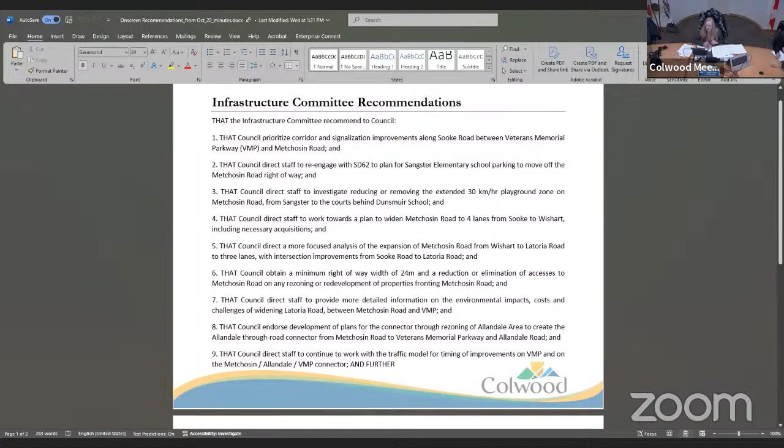When I sent that around to everybody, I agree with this, but not with that. Everybody has a little bit different perspective. I wanted to clarify that council was not anticipating recommendations from this committee at this time. We're fairly early in the decision-making process, still trying to put all the information out there from staff and have the committee understand, and go out to the community to hear from them as well and continue that discussion. But I think it's important that if the committee wants to suggest things to council, they are able to do so. So I'm at that somewhere-in-the-middle stage of trying to say this is what the committee was thinking, and whether or not you want to send this forward to council at this time is in the committee's hands. I have not put this forward to council yet because I didn't feel I had a clear understanding that I could represent you well at the council table in support of the motion.

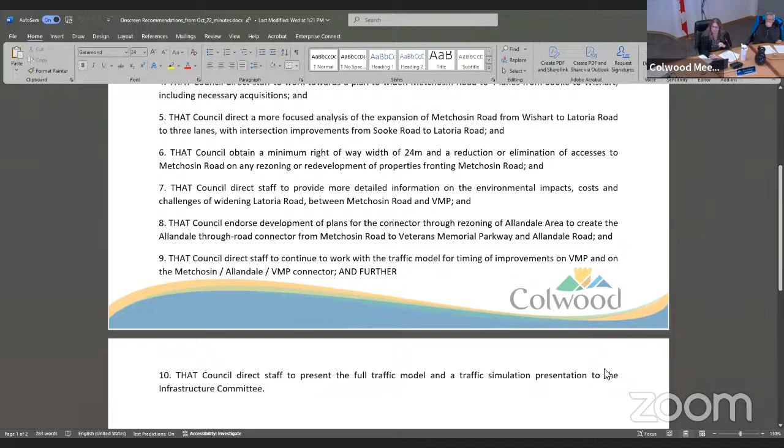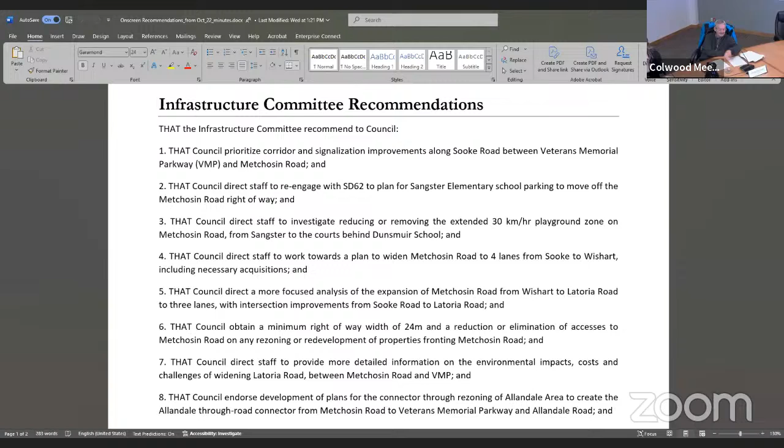I agree. Okay, we will revisit the motion. So shall we table the minutes for now then? Would you like to move that we table the minutes till after the discussion? We can table the minutes till after the discussion. Thank you. Is anyone opposed to tabling the minutes until after the discussion? Seeing none, that is carried.

All right. Okay, I'm sorry, I'm losing my spot on my agenda. Too many pieces.

Now we have opportunity for public participation. Is there anyone online? No, I don't think so, other than committee members. And there's no one in the audience. Therefore, we will move on then to the traffic model simulation. Josh.

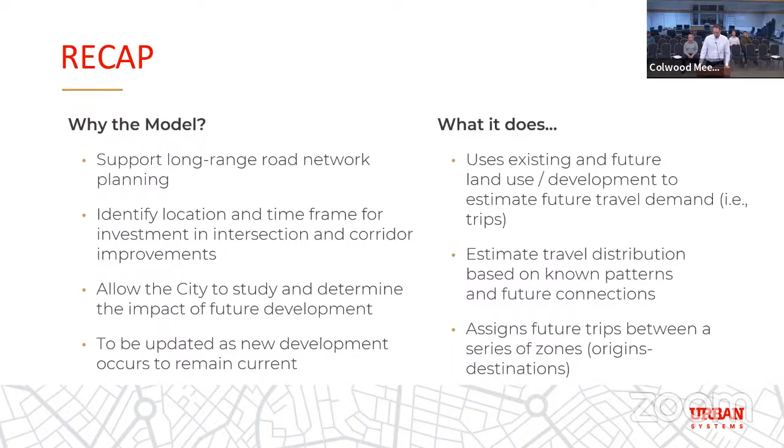Last time around we introduced the map on the right here, which divides Colwood into 22 zones, and I believe there were 8 external zones as well. All of the travel demand and trip-making happens between each of these zones.

We also talked about how the model represents the morning peak conditions, which is sort of the most concentrated and predictable period for traffic.

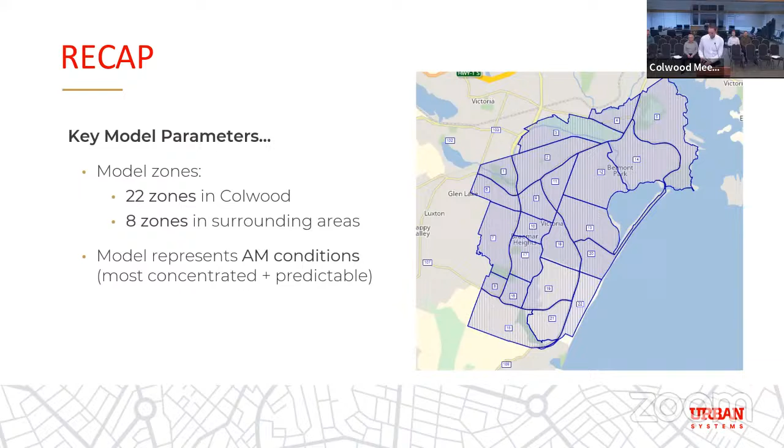There was a fair bit more in the presentation from a couple weeks ago, but we got to two key candidate scenarios, the ones on the screen in front of us. The one on the left represents corridor widening on Latoria with a package of improvements on Metchosin Road as well. The image on the right focuses on four-laning along the length of Metchosin with a package of improvements along Latoria as well. There was a fair bit of dialogue around exactly what's behind these two scenarios.

In a little bit here we've got some added information, some new maps that we think do a more complete job of describing all of the improvements to be included in each of these scenarios. So there's a little bit more coming on that.

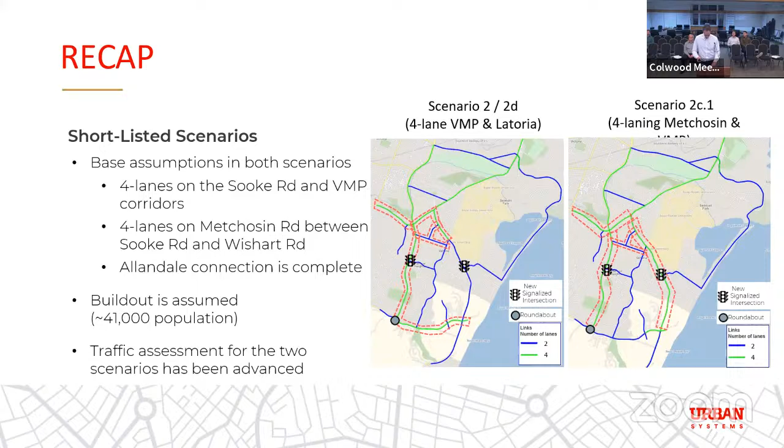Okay, and then we did a recap on the modeling work and the two different packages of improvements. There's a way to get acceptable and comparable traffic conditions under each scenario, but we concluded that there are other things we should be considering beyond simply traffic performance in determining which package of improvements would be the preferred way to go.

So we talked about traffic performance. We also talked about things like the potential and timing for redevelopment along these corridors, how much time and complexity it might take to assemble the additional right-of-way needed to achieve four-laning on either scenario. We talked about complications around utilities, pole movement and or potential undergrounding, which has significant complication and cost. We talked about some environmental concerns, and generally about the capital cost associated with each scenario.

So this is really where we concluded last time around, especially with respect to the presentation, and obviously there was good dialogue and Q&A that came after that.

So next I was going to move to some of the new additional information. Before I do, happy to pause.

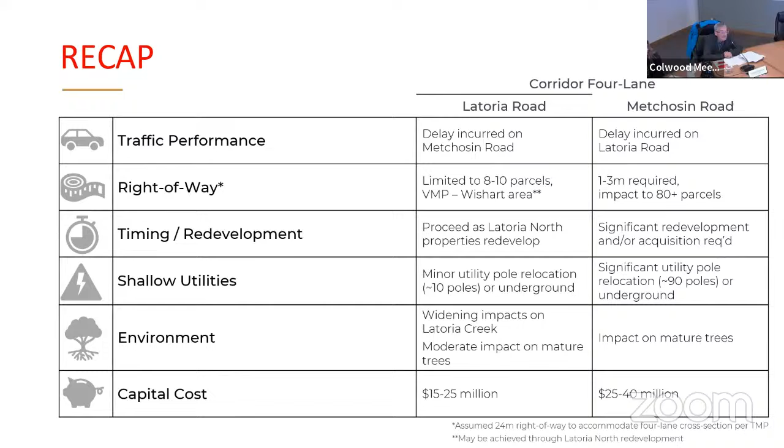I just wanted to ask, did I hear you say that under either scenario, the traffic congestion or traffic performance is about the same? So similar results if you do option A or option B? That's how we build these scenarios, to try to get them up to a level that we believe in the future will still be acceptable and comparable. Okay, thank you. That's a big step. That's news to me, so thank you.

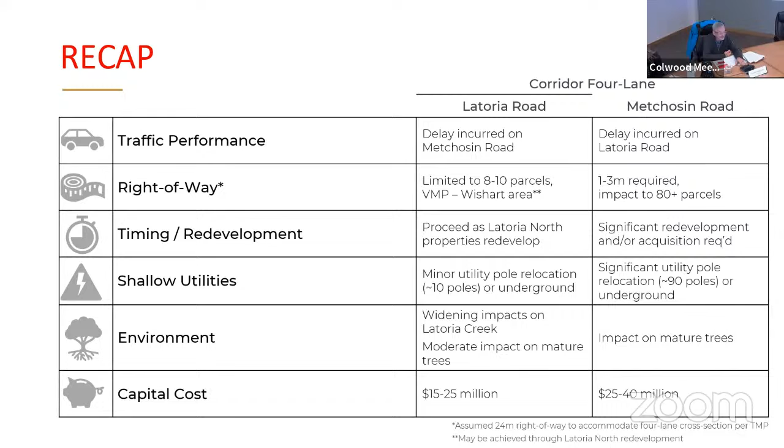I think part of that too, was just, we also entertained scenarios where only a single corridor was widened, like maybe just VMP or even just Metchosin, and concluded that under that ultimate build out scenario, which is kind of all of South Colwood, the traffic conditions would not be okay. So those weren't advanced. We also entertained a scenario of VMP, Latoria, and Metchosin all being widened. The conclusion there was that because the two shortlisted scenarios can get to a decent and acceptable traffic performance, the cost and complication associated with trying to widen all three was excessive.

Dan, for clarification, I want to be sure on the right of way, Metchosin Road, 1 to 3 meters required, that's 80 parcels. Now I'm assuming that is Metchosin Road from Latoria to Sooke Road. Correct. And if that's the case, do the new sidewalks that were poured 3 or 4 years ago have to be removed to do that? I can't say for certain, but my hunch is yes, they would be. Okay, thank you.

Okay, moving along. So we heard the conversation around the table a couple of weeks back, took back some of the flavor and nature of the conversation, and wanted to come back with additional information that we hope answers some of the questions that came up and provides more confidence in how this work was done and where it's going. I'm going to start with some visuals we developed to help better communicate what's involved in both of the two shortlisted scenarios. I'll work through those, and then my colleague Ming, who's in the meeting online, will speak to some of the details of the modeling work, including expanding on the difference between the citywide travel demand model, intersection modeling, and simulation.

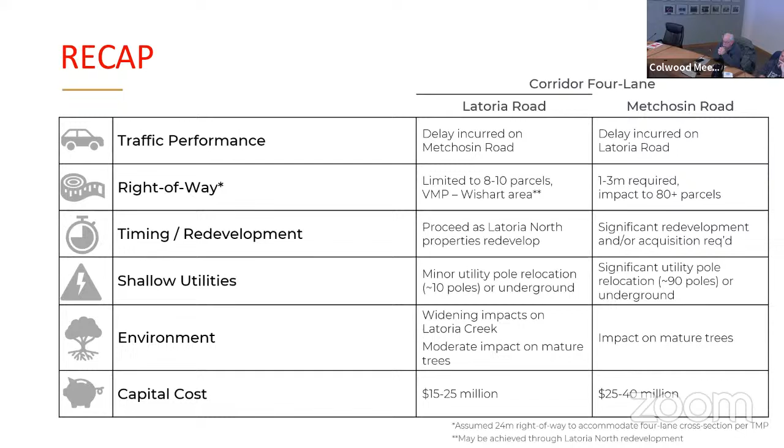Carry on. Okay, so I think last meeting there was a fair bit of dialogue around understanding that it's not quite so binary as to say it's 4-laning this one or that one. It's actually a package of improvements focused on 4-laning of this one versus that one. But there was a desire to better explore and understand what those supporting improvements might also be, not simply just which corridor gets widened. So we've pulled together a series of maps to help visualize that, and maybe I'll walk the group through those, but please throw up your hand if there's anything you'd like me to pause on and explain further.

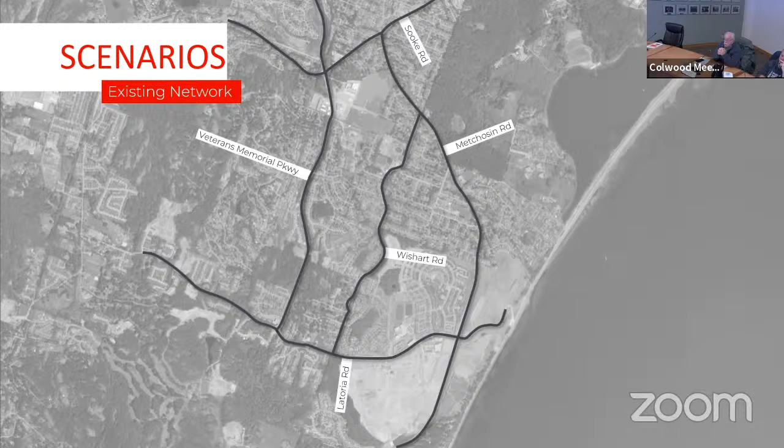So here's your major road network in South Colwood. Now, we talked last time about some improvements that we're suggesting need to happen in the network regardless of scenario, and that's what's being shown here. That's 4-laning Veterans Memorial Parkway all the way south to Latoria, shown in thick red line. That's the 4-laning of the remaining portion of Sooke Road, the section between Metchosin Road and VMP. That's the northern section of Metchosin, Latoria to Sooke. And that's the Allendale extensions we talked about, not 4-laning those, but connecting them at a 2-lane scale.

Can I just ask why Veterans Memorial is deemed as requiring those additional lanes from Carindale to Latoria? That's not typically an area where I see backup. I see people drive that section quickly, and sometimes there are long lines of traffic, but that doesn't necessarily mean those improvements would lead to better commute times or address capacity issues.

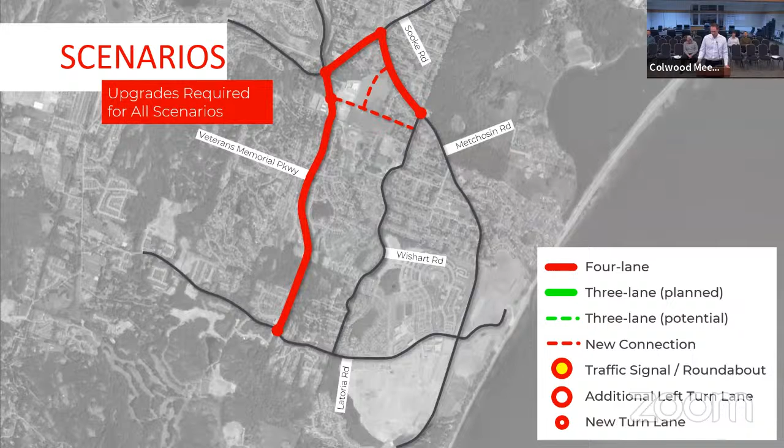Good comments. So keep what's on the screen in front of us in mind. These are a series of improvements being shown under both of the two scenarios under consideration. Scenario 2D is the Latoria Road focused widening scenario. What we've done here is shown the improvements we just spoke to, layered on the improvements specific to this scenario. We talked to much of this at the meeting a couple weeks back, but thought it would be helpful to come with visuals to show what and where. So that's what's on the screen in front of us.

So for scenario 2D, it's obviously the 4-laning of the Latoria corridor. It's the expectation that over time, traffic signals are going to be needed at Wishart/Latoria and Byzantine/Latoria.

Then if we shift over to the Metchosin corridor, we heard a lot of conversation last meeting around: well, if it's not 4-lane, could it be 3 lanes? That third center lane would be left turn pockets at key side streets, and potentially two-way left turn lanes in the center for portions of it. So we took that back, and this is diagrammatic - it has not been designed, but the goal was to demonstrate where that third lane, the center lane, might actually have some really great value.

So the thick portion of the green is extending roughly from the top of the hill at Royal Bay and Beachlands, starting right at the beginning of the top of the hill and extending about as far as just past Painter. Beyond that, we get into single family on the west side, roughly, and the Royal Roads forest and fence line on the east side - so we're not seeing the same level of value in providing that center lane for just one-sided turns.

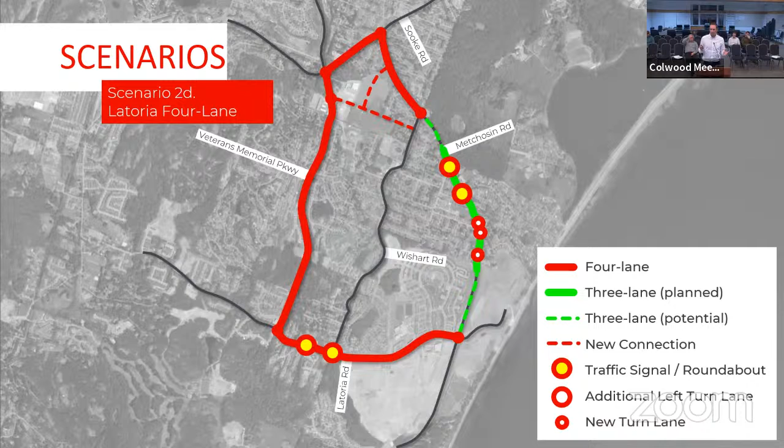Okay, so this is the 2D scenario, the Latoria widening scenario, with kind of the full package of improvements elsewhere in the network. And then we switch over to the Metchosin 4-lane scenario. So this one, I guess the highlights or the menu of improvements include 4-laning of Metchosin for the full extent, including the portion from Sooke to Wishart and then Wishart to Latoria. It would presumably transition down back south of there.

Still includes the expectation that Lagoon and Painter will require upgrades into the future. Our expectation is that by focusing, widening, and in doing so encouraging more traffic in this direction, there's going to be added turn lanes needed at Wishart and at Sooke, and even the potential for dual left turn lanes to move as much traffic through each signal cycle as we can, to not interrupt the through flow, which is going to make for some potentially pretty major intersections.

The left turn ads we introduced last time around on Metchosin Road at Hatley, Cotlow, Ben Homer - there's probably less of a need for those under this scenario, but still the potential in the longer term, they might be beneficial if through volumes continue to climb on this corridor.

And then the expectation also that on Latoria, a signal at Wishart is still going to be necessary, and that Latoria Byzantine intersection as well, really largely driven by what the immediate development around that location looks like. So, yeah, this is kind of the full package of improvements that might be associated with the Metchosin Road 4-laning.

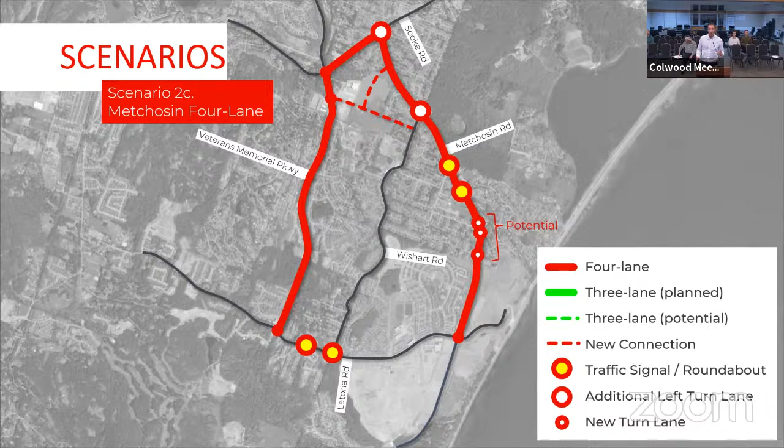So Ming, are you there? Yes, I am here. Thanks, Dan. First of all, check my audio, audio check. Yeah, you sound okay, good. Oh, okay, perfect, thank you.

So I'm going to talk about some specifics about the modeling work that we have done, and always feel free to ask any questions as I go. So when we say model, it's very specific to a model called a travel demand model. I want to emphasize that the model we're calling is different to the simulation that we later refer to. A travel demand model is a tool that we use to forecast future traffic volumes as a result of change in land use network. And the software that we used for this particular travel demand model for Colwood is called Visum.

For a travel demand model, the input is land use and network. So for example, when we develop an existing model, we will input the existing land use in terms of population, employment, and all the breakdowns. We also code the road network into the model, and we do the same for future scenarios.

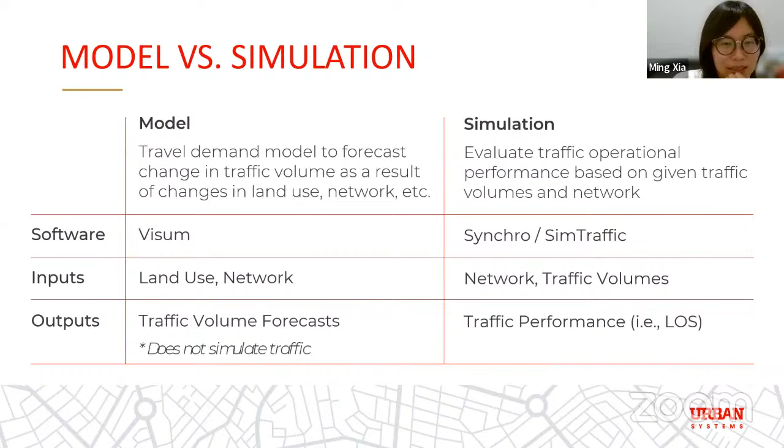Next slide, please. I just wanted to touch base a little bit on model calibration.

This piece is crucial when we develop a travel demand model. I know there have been questions about how the model would pick one route versus another. The foundation of developing a travel demand model is always to make sure the existing base reflects today's condition. So once we develop the existing base case, we need to compare the model results against the observed information, to make sure the model follows the same logic as today, which gives us a solid foundation to predict the future.

We have a few bullets here talking about the considerations we apply when we calibrate the model to today's condition, and these all follow industry standards. This included trip generation, trip distance, and traffic counts.

When we develop the existing travel demand model, it always takes quite a few iterations. Through these iterations, we compare the model results versus the CRD household travel survey, checking whether the trips generated within Colwood are comparable to the travel survey for Colwood. We also check the trip distance the model is projecting for today's condition versus the survey numbers, to see if they are comparable.

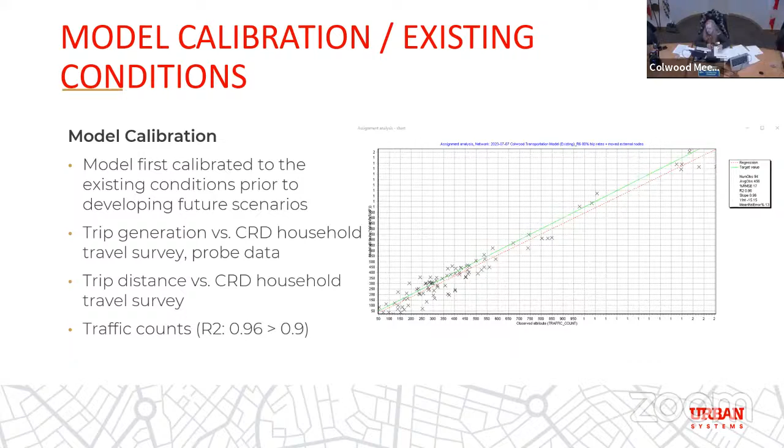Part of the reason is that a lot of these counts are low in terms of their magnitude, and there are a lot more counts on the lower end. These are more difficult to calibrate because the volumes are lower and they get more sensitive to certain changes. Usually we're trying to make sure that the bulk of the volumes are following each other, knowing that some of the lower volume locations might not be 100% calibrated.

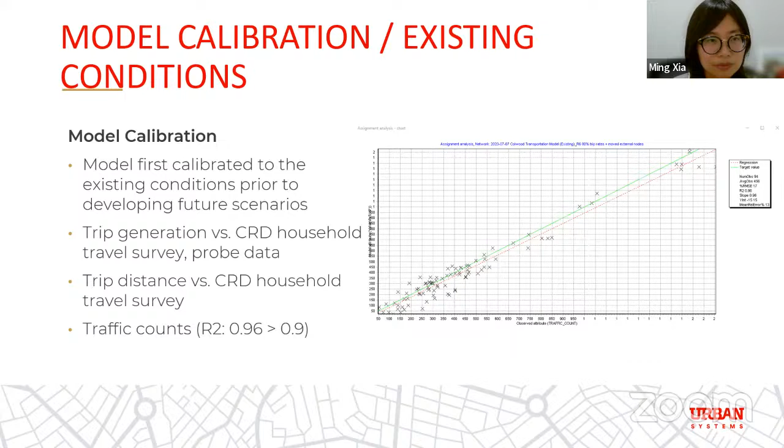Back to the previous slide, there are a lot of locations. Some of these locations have fairly low volumes, but we compared all of them, knowing that some might not necessarily be well represented in the model. The focus was put on the major corridor level, where there was a lot more traffic volume, because that will be the focus here.

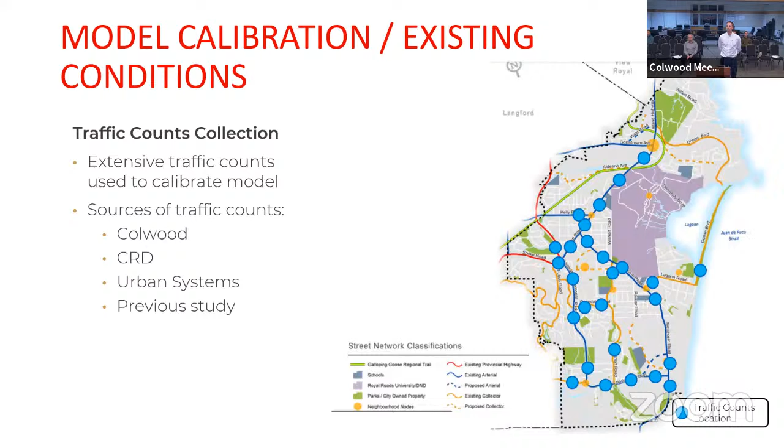I just wanted to keep in mind that there are quite a few different ways that we're getting data. We're getting data from actual traffic counts done with various pieces of physical equipment. We have traffic counts potentially done by static devices we've upgraded in our community, including Blue Toad for travel time measurements, and some of our newer, fancier traffic lights that may modify themselves based on traffic speed or conditions. So we're trying to look at where all our data is coming from, to check that our assumptions are correct and that we're not missing something.

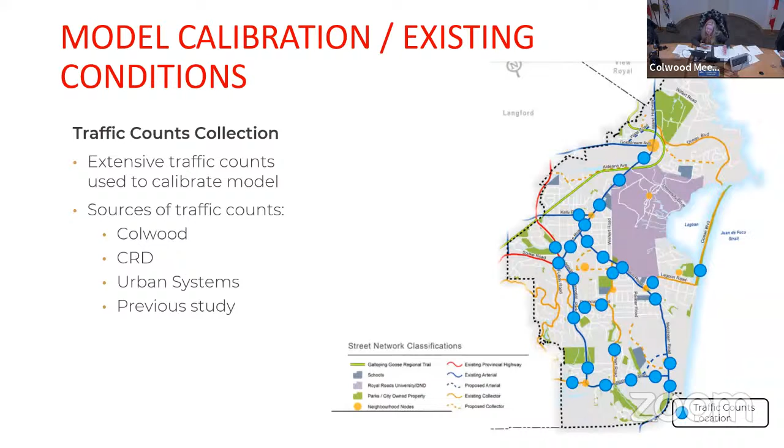Yeah, 100%. We definitely wanted to use as many sources as possible to make sure we're confident when building our analysis.

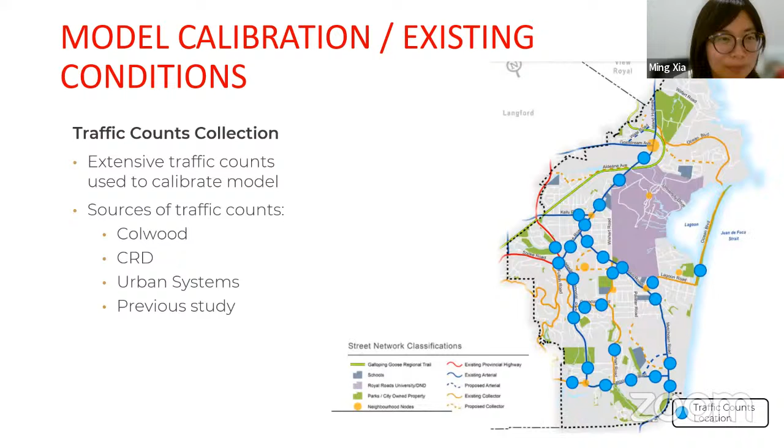Okay, so route choice. How does the model assign traffic? There's quite a bit of text, but I'll try to simplify the procedure and hopefully explain this better.

The first step for us to develop the travel demand model is to make sure the existing model is calibrated, meaning it reflects today's conditions. Once we confirm the existing model is calibrated, that means the way the model builds the OD pairs, origin-destination pairs, makes sense based on existing land uses. So if we have population and jobs in certain areas, the model is able to build travel patterns between these areas in a reasonable way.

We know the model is building these predictions reasonably by first checking the model counts, model volumes, trip distance, and trip generations. Once all these parameters have been checked, we believe the model is able to develop OD pair patterns based on the land uses inputted into the model.

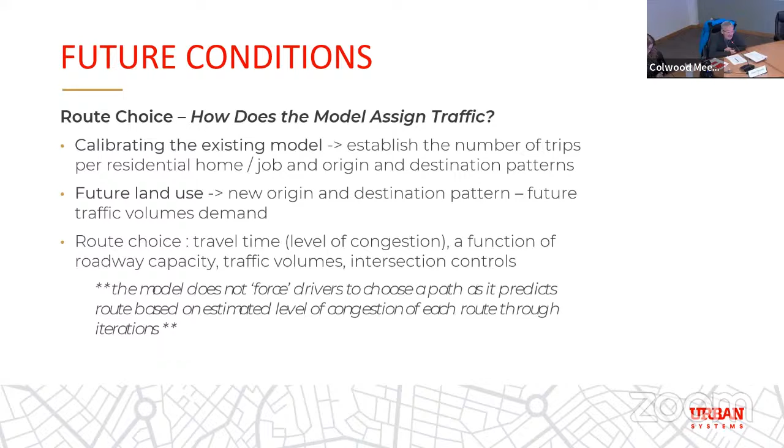There you go Stuart, heck of a job what you've done here. But from what I'm hearing, you haven't looked at mode shift, just more of the same, and you based it on full build out. It sounds to me like what we're looking at here is perhaps worst case scenario. We're all optimistic that something's going to be done somewhere about the traffic, but that's something probably for the committee to chew on over the coming months, what parameters do we set. If this is the worst case scenario and we believe there may be some options out there to improve upon it, it probably speaks more to the timing of when these things are done than not, but that's useful for me to have in the back of my head. So thank you very much.

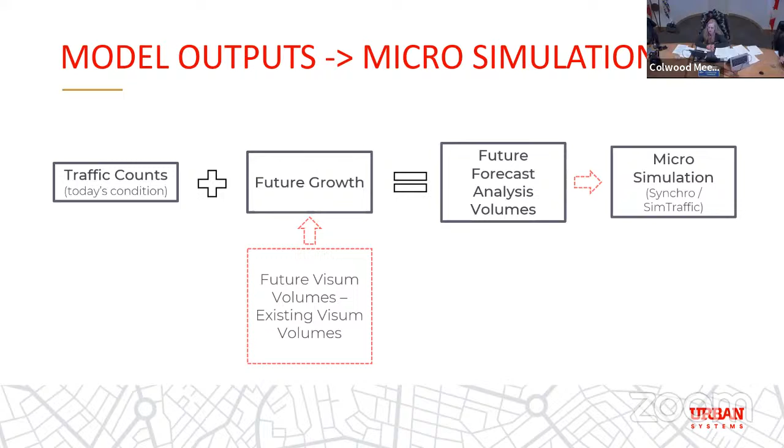Or it could be capped with mode shift also -- that's another future potential. All right, I'll let you carry on. I'm seeing no more questions.

Okay, so now moving on to the micro-simulation model. We have some images here to illustrate what the simulation tool would look like. The picture in the middle is really an image that illustrates the network that's coded into the model. I had to take out the background image, otherwise the network doesn't show up very well. So there's a zoomed-in picture on the right-hand side.

It's really just to show how the network will look in the model. It doesn't mean that this is what we're proposing -- it's an example showing the laning that could be coded into the model. When we run simulations, we look at this network and we'll see vehicles running through it. That's how we'll watch the simulations.

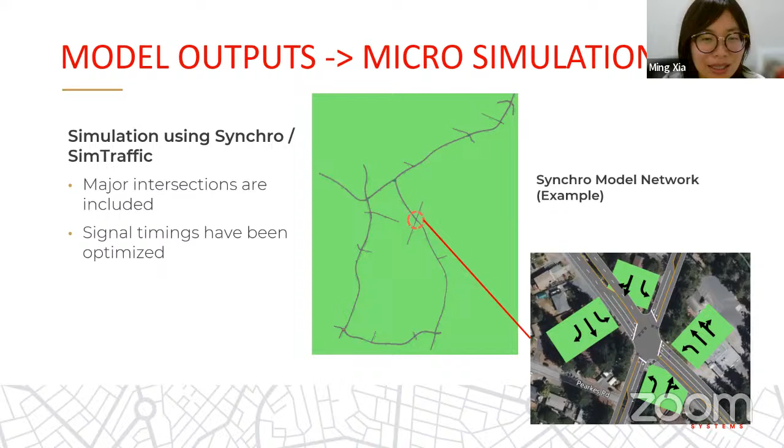Okay, and just some images from different software, kind of explaining that there are different tools. The one on the very left, that's a screenshot from Visum. It's showing the volumes along a corridor, and the table below gives information around traffic volumes at this intersection at certain movements.

The one in the middle is from Synchro. Once we have the volumes established using Visum, we move on to Synchro and input the volumes. Here is the intersection with a lot of traffic volumes assigned. When we move on to SimTraffic, we run the model and see traffic volumes or vehicles running in the network. This is where we watch the simulation and see if there's any capacity issue, or any traffic getting queued up. So there are different stages for the type of work we do here.

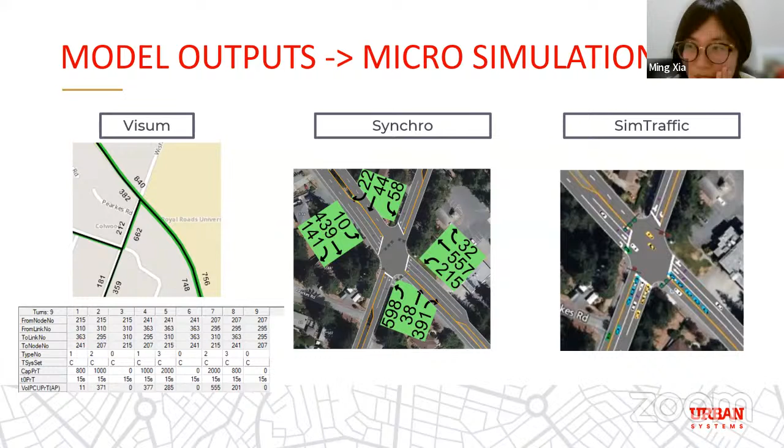Hang on, give me 1 minute. I think once we get that up, Ming, it might be great if you could narrate. We can watch and listen at the same time. There's no audio with the sim, it's just visual. But you're going to see different colored cars, different size cars, and the intersection operations occurring over time, the different signal phasing, certain movements moving and others stopping. So it might be nice if we get a description of that as we go.

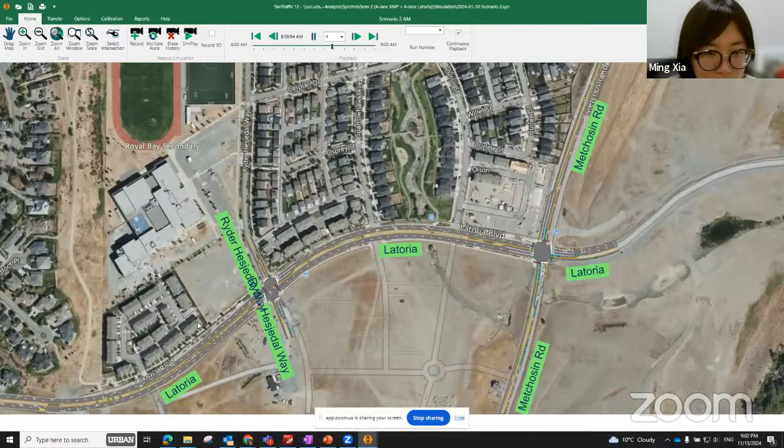If I move further down, this intersection is also pretty busy. And here you can see that the traffic flows generally well along Latoria.

And the traffic that we're observing on the roadway here, is that the future OCP or the existing? This is built out, where we assume Latoria gets widened into 4 lanes.

I just wanted to add that I think they already mentioned for either of these scenarios, with adequate improvements along these corridors, we will be able to reach an acceptable level of traffic performance. It's just that depending on the plan for the corridors, these intersections will require different types of improvements.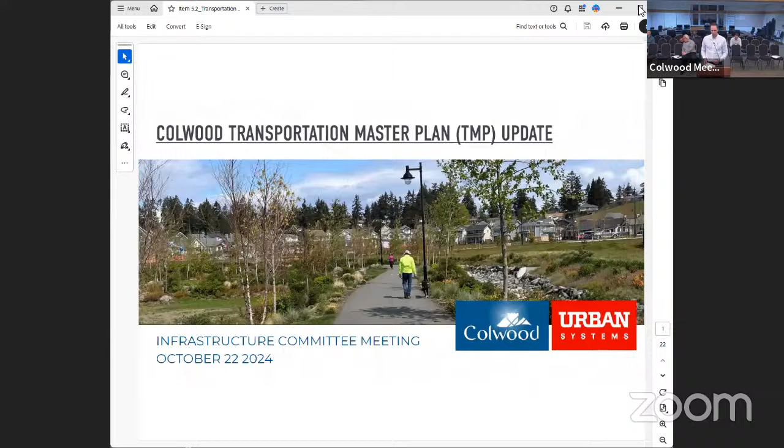So we've prepared a second slide deck here, very specific to the transportation master plan update. I'll walk the group through that. I think I've got about 10 or 12 minutes of material here. I wanted to talk about the process that went into the TMP that is now about 10 years old, and highlight some stats to build an understanding of what's changed over the last 10 years. You'll all have a good handle on much of this too. Then I wanted to turn our attention to what we see this upcoming TMP update looking like. I think we're very open, we've got our thoughts, but also keen on input from the group.

So before we get into it, this is very much open for feedback and validation, but we wanted to highlight where we see the infrastructure committee being involved throughout this update. I think it's an important role the committee plays. We carry out these transportation plan updates, or plans from scratch, in other communities as well, and find it very important to get a committee like this in place to provide insight and understanding to our team, the staff team, but on behalf of the broader community too. We're pretty keen on that involvement here.

So we've highlighted a couple areas where we see the committee's role in this update. One is to provide that insight. Another is to engage in these discussions and receive info in advance of it going out to the public. We can both test and converse with this group, as well as build some support for what we then take out to the community. That's what we see this meeting being aligned with as well.

We would love your input, maybe not tonight but at a future meeting, in terms of generating ideas for what some of the big picture pieces for the updated TMP might be. We want this group to represent the interests of the broader Colwood resident base, being ears and a voice for the broader community. Our hope is that this group can lead as a series of champions for the process being undertaken, as well as the updates that come from it. That's our hope, our intent, and we're curious to hear from the group on that piece too.

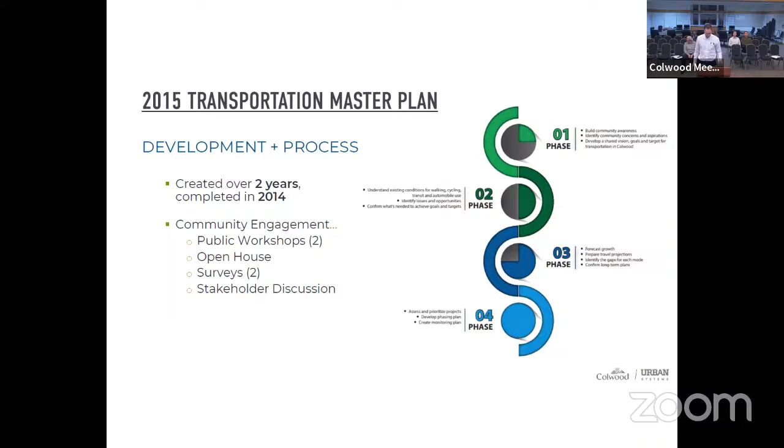So the document is structured into 5 parts. Part 1 is setting the stage, part 2 is stage shaping influences. Part 3 is called overall directions, some of the high level components, the big pieces to the plan. Part 4 is the bulk of the plan, called strategic directions and actions, broken down by different travel modes and options, with quite a bit of content there. Part 5 relates to implementation.

I think we're going to work through this update process. My expectation, and we're not set on this, is that the structure you have in place already seems sound. It'll be rather than necessarily breaking down the entire document, really about updating the content found within it. But we'll go through the process to make sure that still fits and makes sense.

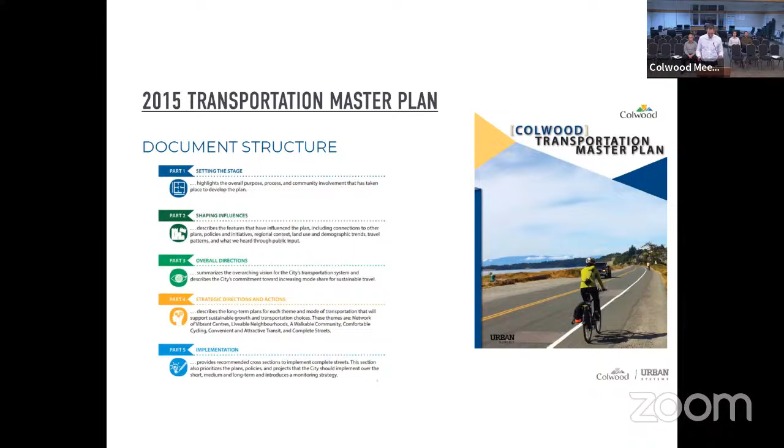And I think how the 2015 TMP has been used over the years, it's guided on the whole, actually quite a significant investment in transportation infrastructure in the community. Fairly impressive how much work has been done over the last 10 years, a lot of it guided by the direction in the TMP. It's articulated the city's intent as new development and applications come forward, been that guide that's been referenced when new land uses come online in terms of what the city expects to see for network build out and things like frontage improvement and contributions.

And importantly, you've updated your official community plan in the time frame between when the TMP was created and today. And so your 2018 OCP, in particular the transportation mobility section, was based on some of the key pieces in the TMP.

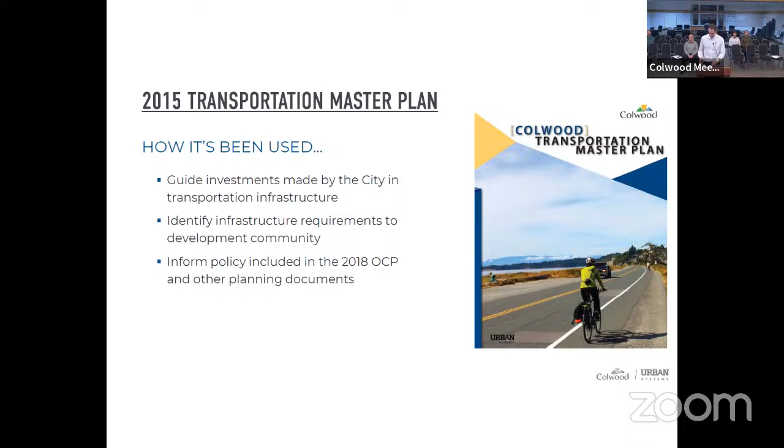Okay, so what's changed since 2015? I just touched on it - the OCP that was the basis for the 2015 TMP was your 2008 OCP. Your most recent update was in 2018, and so that is sort of a new baseline with respect to land use development growth that is going to be referenced for this TMP.

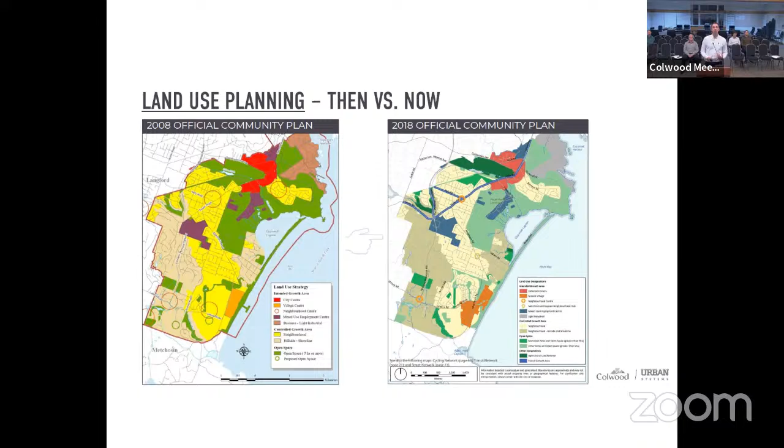Some of the key maps are on the screen - it's the general land use concept from the 08 OCP versus that from 2018. I think some of the key pieces that changed between the two include the added land use intensity down in Royal Bay and Beachlands, and the addition of this transit growth area, which follows a couple of your most major roads where there's policy in place to encourage development and somewhat higher densities along these key corridors. That's not something that was queued up in the previous OCP.

We see some discussion around priority setting in terms of sustainable travel options. We see the addition of identified transit exchange locations, a few key street connections, and the waterfront walkway being specifically identified, which then we understand was kind of a jumping off point for a more focused exercise in that area.

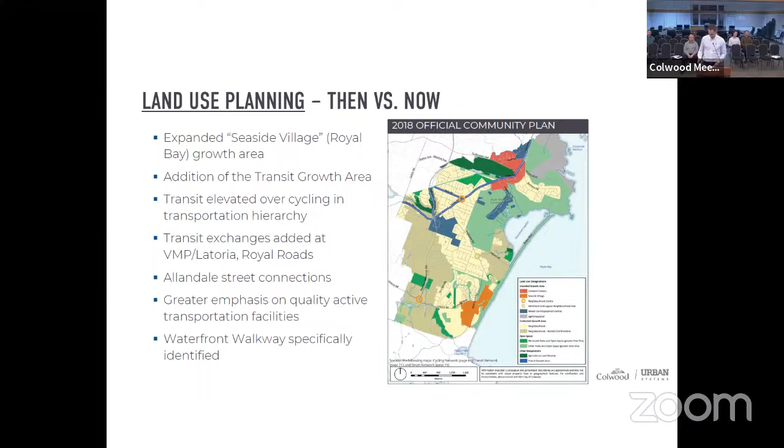I mentioned this wouldn't be news for the group necessarily, but it's almost worthy of a pat on the back in terms of how much progress has actually been made. We can't always say that when we do these processes, but for this one, a lot of these priorities on the screen that have been carried out already were queued up in the previous TMP. So when we think about what the update might entail, these key priorities are done - let's update this list to figure out what might come next.

So maybe we won't touch on all of these, but there are some pretty significant improvements in terms of complete street improvements with what's been done in Royal Bay, as well as the work on Painter Road. There's been some and continues to be sidewalk expansion on a whole handful of streets in the community. Some pretty major intersection improvements, including the VMP Latoria roundabout, and there's been some activity with respect to neighborhood traffic management areas around Hatley Drive and Mountain View, which is the intersection we spoke to a little earlier.

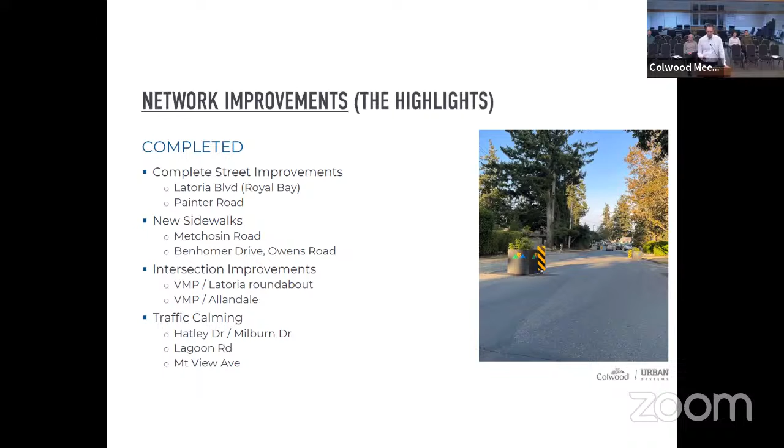We also know there's a couple of very significant projects that are in the works that are going to be online in the not too distant future. These were sort of contemplated previously, but now they're real. So we want to make sure that the planning updated in the refreshed TMP doesn't treat these as ideas, but more like assets that will be online in the not too distant future - and these are very exciting: the waterfront pathway and the grade separated crossing of the Goose.

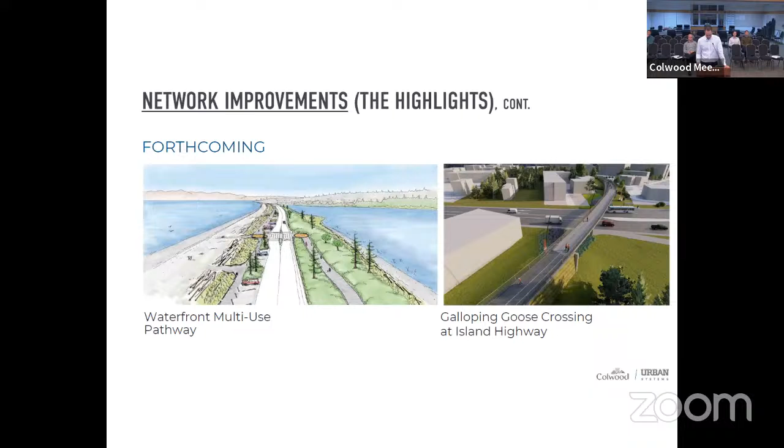Some mobility data. I might go quickly through this, but allow the group to circle back with questions.

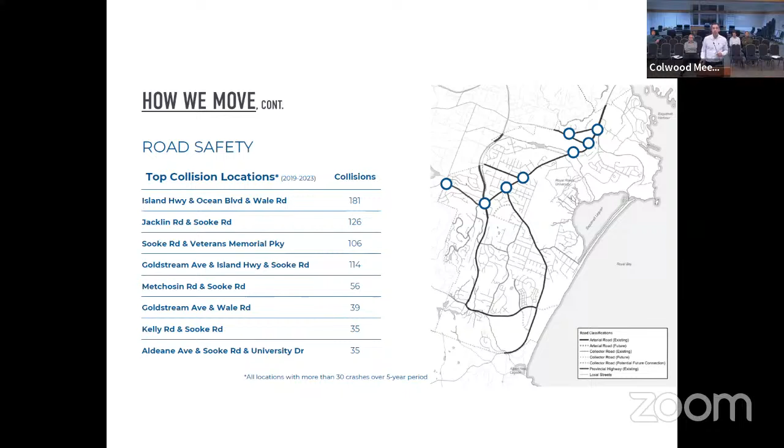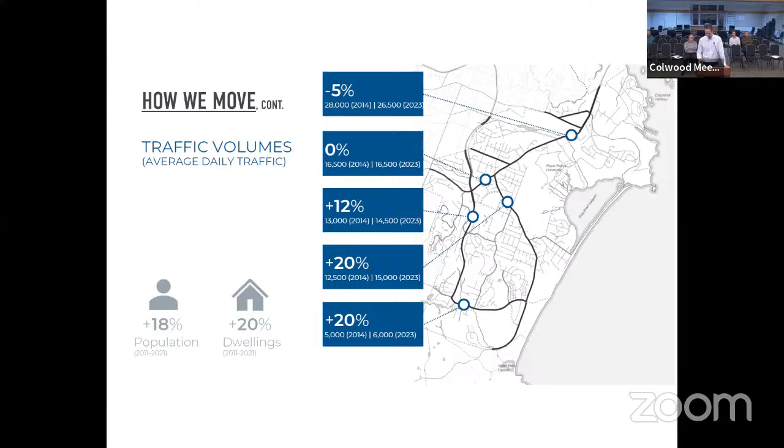So that was sort of a synopsis of what's changed since the previous TMP was developed. And that's important because that TMP was based on the information, the data, and the travel patterns of the time, and we know that's changed over time. So we want to make sure this update is based on a refreshed understanding of current conditions.

So if we turn our attention to what the update process might look like, we want to take stock of quite a considerable amount of planning work that's since been done. So we intend to pull from some of the directions in community plans such as the OCP, strategic plan, your Parks and Rec master plan that was done a couple of years ago has some great direction around your trail networks. That's a very obvious linkage to a TMP.

And then very specific to transportation, a number of initiatives have been carried out or continue to be carried out, generally over the last 3 or so years. Traffic modeling work, which is intended to inform updates to the road network. There's the draft active transportation network plan from 2022, which could give direction to cycling and pedestrian networks specifically. There's a series of corridor studies that came before council, mostly focused on some of the more major roads, so that would feed in as well. Some work around transit planning and transit priority, and then some of the parking work, there's a few different parking initiatives over the last couple of years as well, so that work could logically funnel in as well.

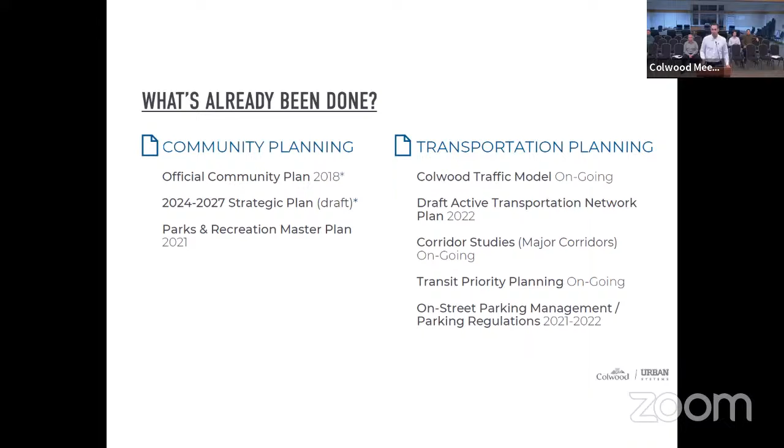Maybe I won't go word for word here, but you have a new vision and series of goals in your official community plan. I think what we've learned is that the OCP does a really nice job, better than most, of laying out some well thought out and deep directions specific to mobility in your transportation network. So we do intend for the TMP to align with that OCP, understanding also that OCP is 6 years old now, and there might be a need to refresh some of those priorities too.

We do know that one of the goals in the OCP is specifically that residents have realistic transportation choices, and so that's something that likely will be a key theme through this iteration of the TMP.

In terms of next steps, some of this baseline work has been done. The traffic modeling work, the ATNP work, some of the parking and transit conversations - we didn't coin it part of the TMP update, but quite literally they are all previous work that is the back end for this current TMP update.

So what do next steps entail? Engagement with Colwood residents is going to be very important. We want to understand current issues from the community's perspective, where residents see key improvements being made, and later on, once priorities are identified in a draft update, take that out to understand the level of support among residents for what's being identified.